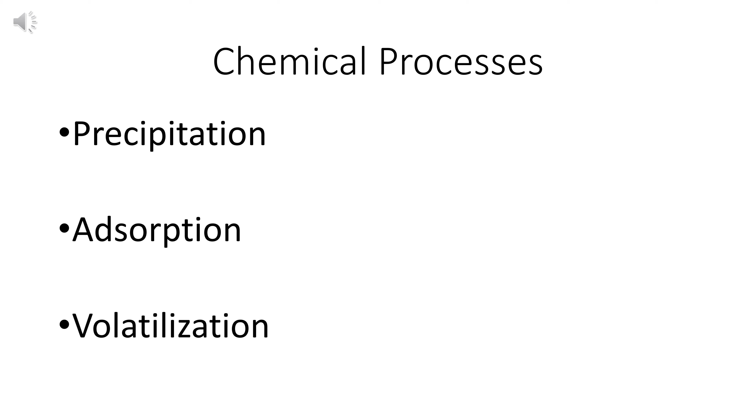Today we will introduce the microbial and chemical interactions in urban landfills and some industrial designs to reduce pollution. The main physical-chemical processes that occur in landfill are presumed to be precipitation, adsorption, ion exchange, and volatilization.

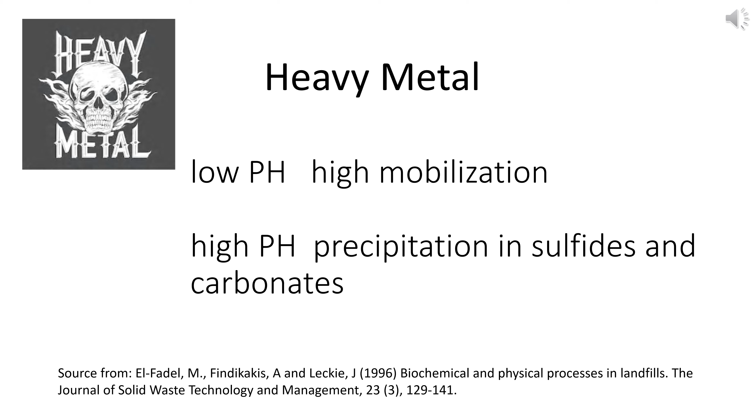Precipitation is an important factor in reducing the concentration of heavy metals in the landfill leachate. Heavy metals are more soluble at low pH, therefore may be expected to be more mobile during the early stages of waste stabilization. When the pH increases, the solubility of heavy metals decreases, and it may also precipitate as insoluble sulfides and carbonates, thereby reducing the concentration of heavy metals in the leachate.

Adsorption is due to intermolecular interactions in the leachate. Adsorption can remove ammonia under anaerobic conditions, and also be important in the immobilization or remobilization of metals. The ion exchange process may be affected by adsorption.

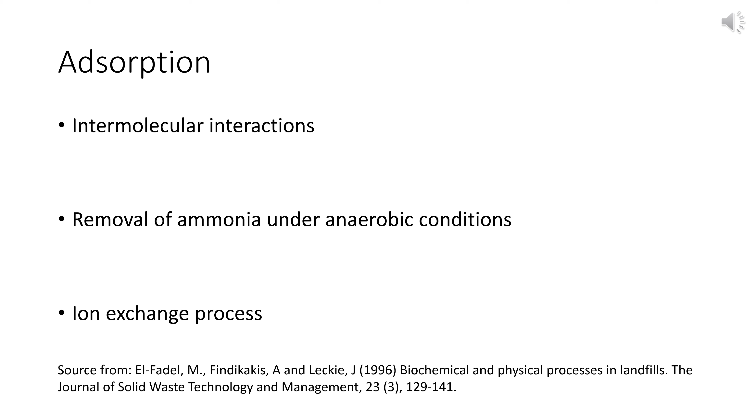After several replacements and readsorptions of adsorbent and adsorbate, almost no ion exchange is taking place. If the ion exchange of heavy metals escape from landfill in leachate, it may have a greater impact on the natural formation.

Volatilization: Volatile organic compounds can be distributed between the gas and liquid phase in landfill environment based on their vapor pressure. It can remove those compounds in the gas phase from landfills by surface emission or gas extraction systems.

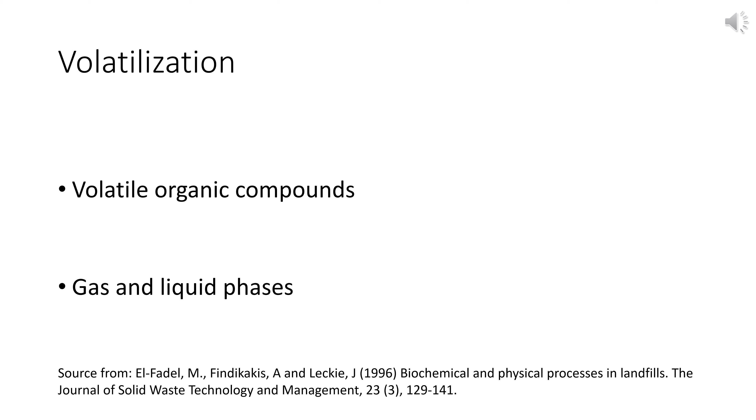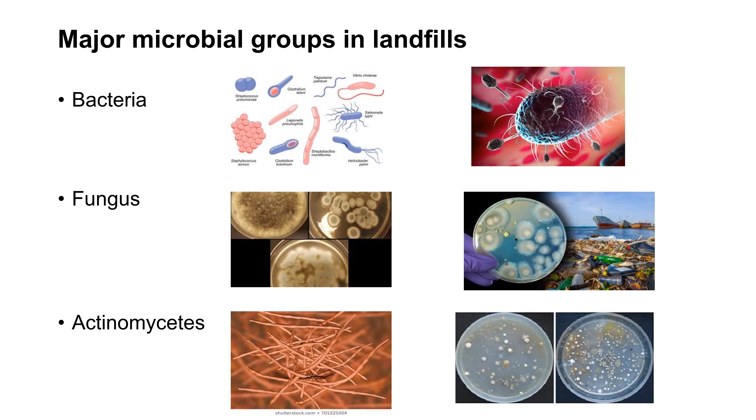The major microorganisms in landfill are bacteria, fungi, and actinomycetes. The good use of these microorganisms can help the efficiency of the landfill.

The methane productivity of garbage is related to the water content, and the optimal water content is 60 to 75%. Different types of microorganisms have different optimum temperatures. In waste degradation, 41 degrees is the best temperature for gas production, and there is almost no gas generation between 48 to 55 degrees.

The optimal pH value of methanogens is 6.8 to 7.5. If the pH is too high, the concentration of CO2 will decrease, and the low pH will inhibit the activity of the bacteria.

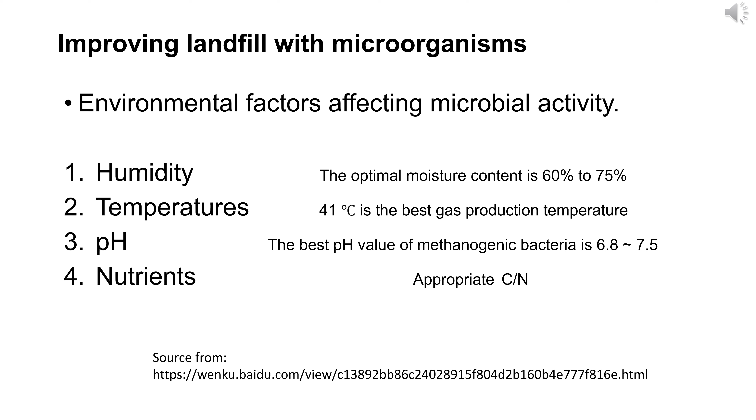The microbial process of landfill mainly includes three phases. When deposited within the landfill, oxygen entrapped within the void spaces is rapidly depleted as a result of aerobic biological activity. In the next, initial phase of degradation begins.

Organic material is broken down to small soluble molecules, which is broken down further to hydrogen, carbon dioxide, acetic acid with pH around 5 to 6. Then they are subsequently contributing to the growth of methanogenic bacteria with the increase of pH.

After the carboxylic acid is exhausted, the extra production by fermentation bacteria is fast. The hydrolysis process of cellulose and hemicellulose is relatively slow, so landfill enters a stable methanogenic phase with pH around 6 to 8.

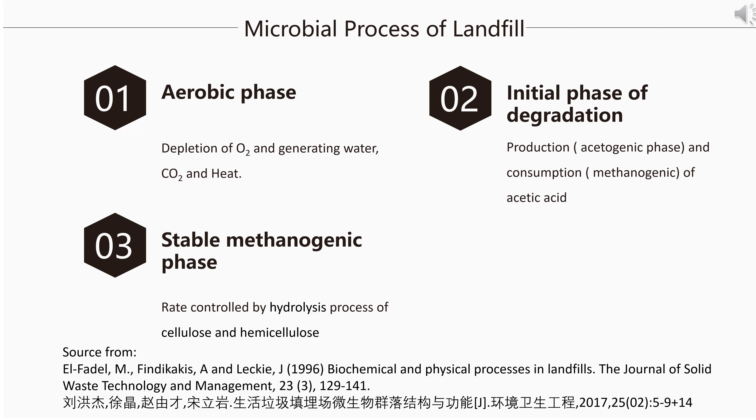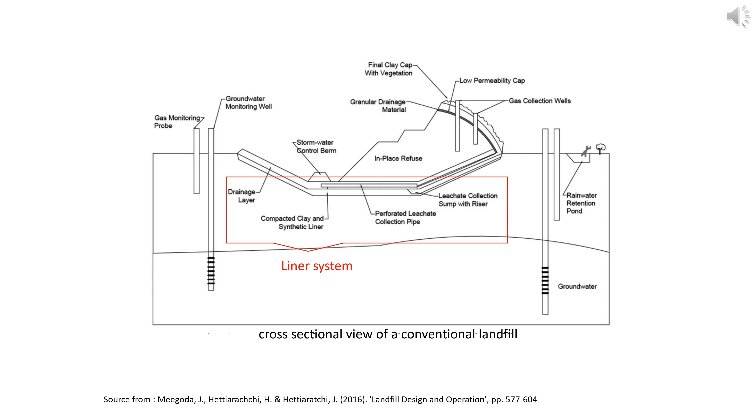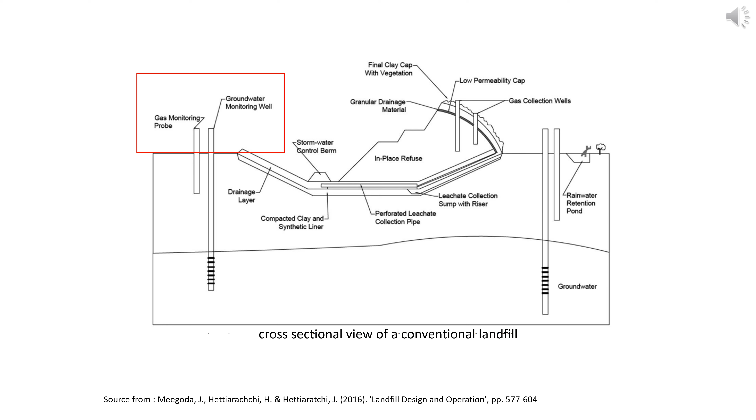At the end of landfilling, low permeability cap and the final clay cap with vegetation would be used for capping. Apart from liner system, gas monitoring system, groundwater monitoring system, and leachate collection system is also necessary for a completed landfill.

During the landfill process, a series of pollutants such as toxic leachate will also be generated. If these pollutants enter the environment, they will affect a series of organisms.

Fenton method is an effective method for treating sewage. Combined with sawdust, it shows a high capacity to adsorb the ammonium, iron, and copper present in the landfill leachate.

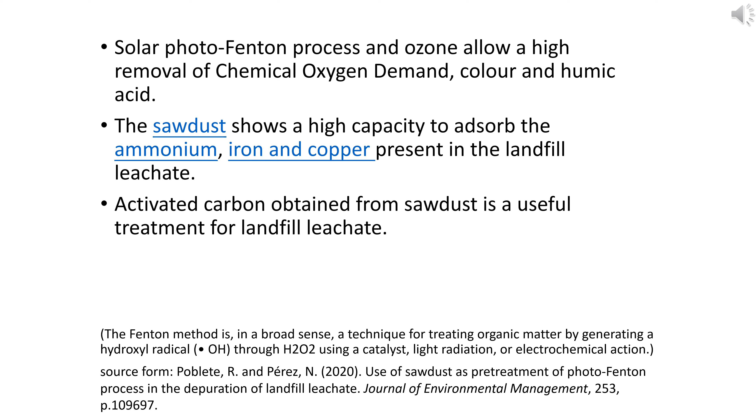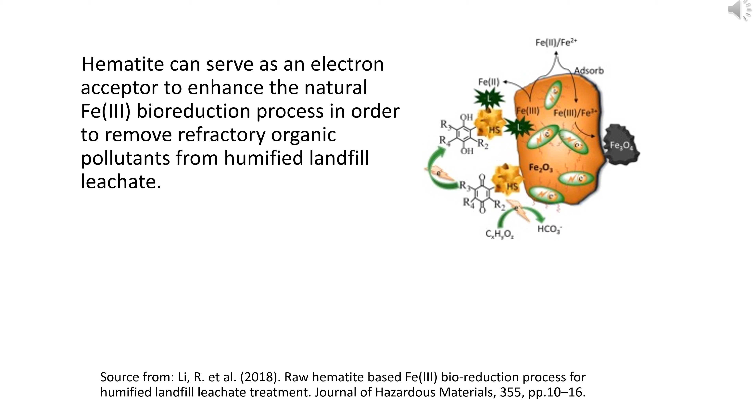Also, hematite can serve as an electron acceptor to enhance the natural ferric ion bioreduction process in order to remove refractory organic pollutants from humified landfill leachate.

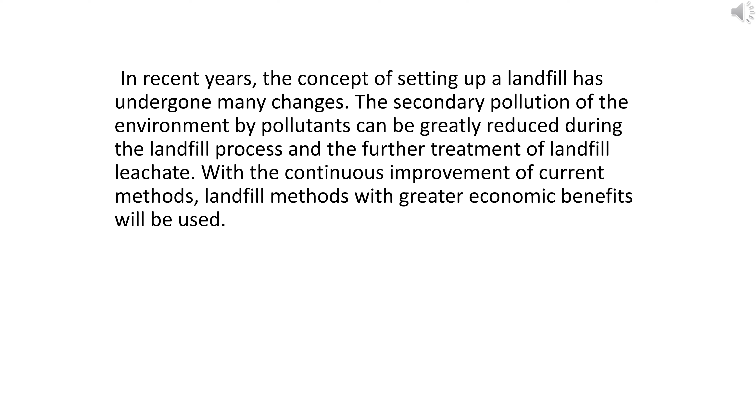In recent years, the concept of setting up a landfill has undergone many changes. The secondary pollution of the environment by pollutants can be greatly reduced during the landfill process and the further treatment of landfill leachate. With the continuous improvement of current methods, landfill methods with greater economic benefits will be used.